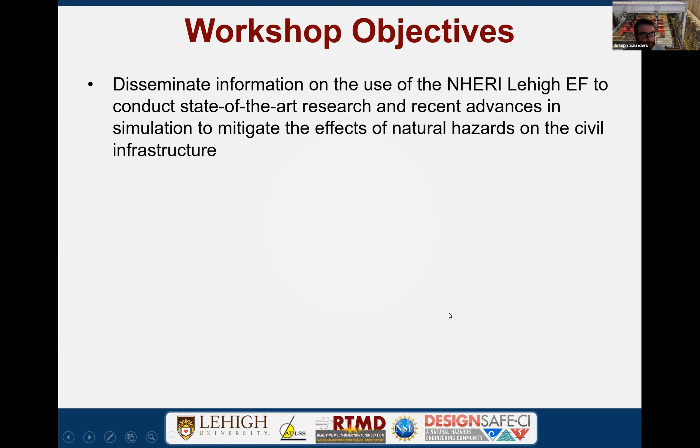Can you go to the next slide please? So our workshop objectives here: our plan is to disseminate information regarding the NHERI Lehigh experimental facility, what we do, the research we do, focused on mitigating the effects of natural hazards on civil infrastructure. We'd like to communicate our capabilities and what we can do.

Also, a focus here is to showcase our expanded capabilities that we've recently partaken in. We've expanded our capabilities at the facility, including the real-time cyber physical structural systems testing facility. It's quite a mouthful, but increasing capability is something we're always looking to do and expand our research capabilities. So we'll go into a little bit about some of the experiments we've done using this new equipment, and showcase and highlight the research we're currently working on in natural hazards mitigation.

And then finally, we'll wrap it up with identifying and showcasing how you can work with us and utilize the experimental facility here.

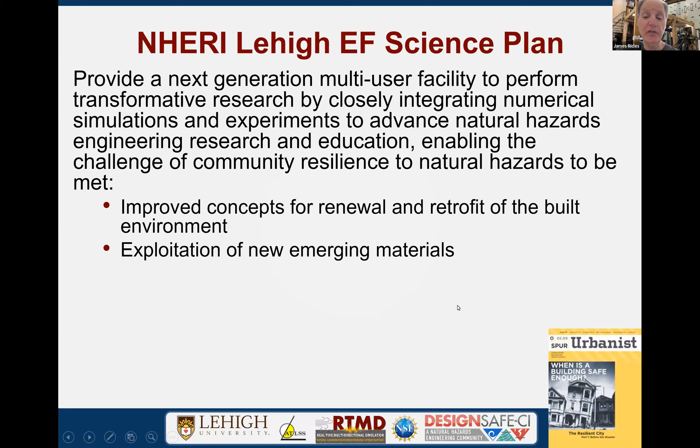To do this, we closely integrate numerical simulations and experiments, and the objective is to advance natural hazards engineering research and education, and to mitigate the effects of these hazards, enabling the challenge of community resilience to be achieved. This is met by improving concepts for renewal and retrofit of the built environment, and exploitation of new emerging materials, some that exist, others under development, and those are the future.

Development of innovative resilient structural concepts, economical design approaches towards natural hazard mitigation, so that innovation and economy is very important, and then development and validation of more accurate physics-based computational simulation models.

In the end, what NSF likes to endorse is that experiments have a purpose, and they're very important. They enable you to acquire data, which we're able to provide the means to do. But in the end, that information needs to evolve to where it eventually reaches practice, usually through computational models that are developed. But in order for them to be accurate and validated, you need the experimental data.

Let me continue with the science plan. One of our focuses, I'll just say one, but we have others, and I don't want to discourage you if you're not into hybrid simulation. Don't worry, I'll entertain you with some other approaches, but we do a lot of multi-directional and large scale real-time hybrid simulations. This essentially combines physical experiments with computer-based simulations to evaluate the performance of large components and systems and their interaction.

If you wish, you could think of hybrid simulation as being cyber-physical simulation. It's basically similar in concept. Our facility provides user-friendly tools that enable researchers such as yourself to readily utilize this advanced testing technology and algorithms to perform complex experiments.

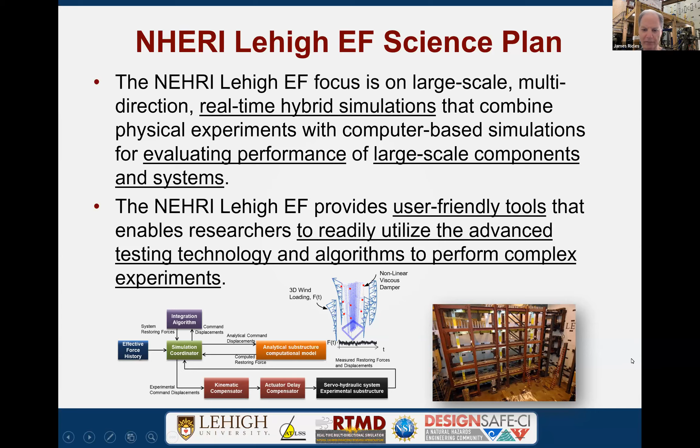Our facility enables researchers to readily perform, I'll give you some examples here, 3D hybrid simulations. RTHS is the abbreviation for real-time hybrid simulations of, again I want to emphasize, complex nonlinear systems. When you get multi-natural hazards, we're thinking about extreme events here, and usually the system may go nonlinear, either geometrically or material-wise.

So that we certainly could account for, and examples could be storm surge, wind, or earthquake. Those are the three that come to mind that NSF has really recently dealt with, particularly the first one with climate change. We use analytical substructures created with robust computational modeling, done this from the ground up, and below is just an example of a tall building at Lehigh that's subjected to multi-hazards here.

We have numerous response modification devices that could be used that are in our lab or that others may bring as researchers, and we can integrate those into the simulation. If there's not enough of these devices that could physically be placed, usually there's a restriction because a tall building may have 100 of these, and of course you may not have 100 on hand, we can numerically model some of those devices and use model updating so you can accurately get an assessment of the overall system and how those devices modify the response, using this model updating in conjunction with the physical model devices.

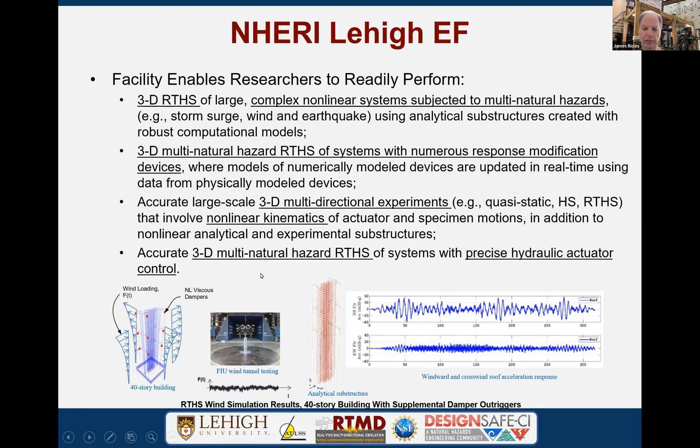What are some of the key questions that could be addressed through the research that you perform on our facility? Just to give you some research ideas. One is to develop and implement into practice new natural hazard mitigation strategies and innovative resilient structural systems. This is a little vague, but it's at the top level of what a proposal may be looking to achieve as an objective.

I think some other things that need to be considered are enhancing our understanding of response to multi-hazards, accounting for soil structure interaction and also fluid structure interaction. You find when you look at soil structure interaction, the whole picture changes. It could be an impediment or it could be an advantage, and it could change the behavior that really needs to be accounted for.

There's a comprehension of the system level effects on the structural and non-structural components through these large simulations. Sometimes the non-structural components are of greater financial and monetary value than the structural components, and the structural system may be condemned simply because the non-structural components don't continue to function. So non-structural is very important as well.

Now, again, I'll just emphasize computational modeling. You can acquire high quality experimental data - we'll talk about some of the instrumentation aspects later - but this will enable you, if you get the right type of data, we always offer some suggestions when asked, on how to develop the improved computational modeling by seeing what data you need to do that. Usually it's force deformation. And the outcome of this is to be able to predict community infrastructure resilience, where these response modification components are integrated to alleviate natural hazard effects.

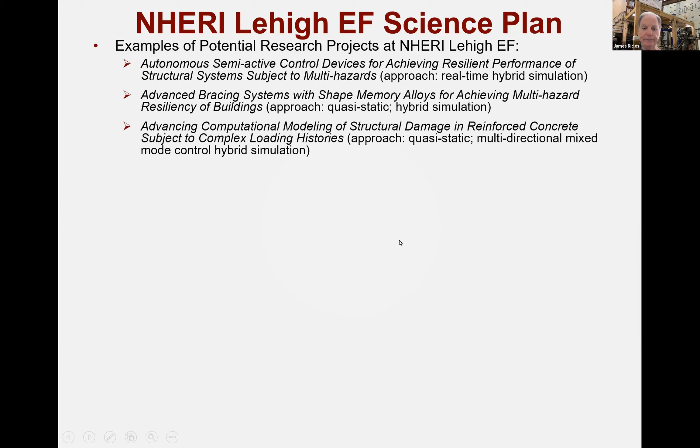On the other hand, you may be wanting to advance computational modeling of reinforced concrete for complex loading histories. There you would perhaps consider some quasi-static characterization tests, as well as multi-directional mixed mode controlled hybrid simulation to get these complex loading histories.

Looking at quantifying multifunctional floor isolation systems through cyber physical testing - this is something that would involve real-time hybrid simulation because of the rate dependency. We have, again, like multi-directional floor isolation systems, non-structural components of systems which minimize the multi-hazard losses. It could be cladding or piping systems, say in buildings as an example. And there we can look at hybrid simulation and real-time hybrid simulation.

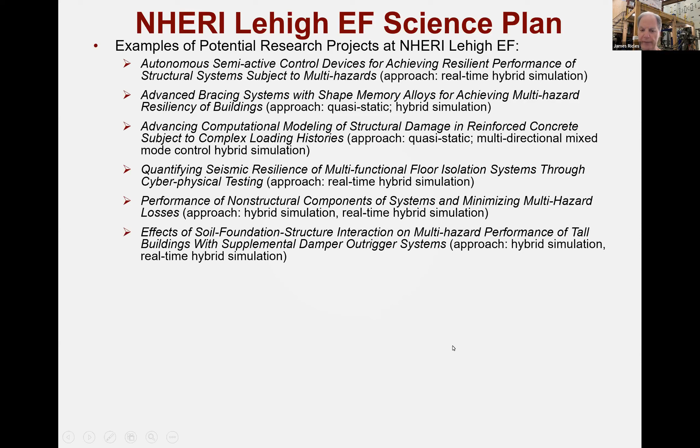Mentioning again soil structure interaction, the effects of that are very important in the interaction that it has on performance, particularly of tall buildings with supplemental damping outrigger systems. These foundations that these systems are tied to could have an influence on the effectiveness of the systems of performance, since these supplemental damping systems are themselves typically rate dependent. You will probably have to consider real-time hybrid simulation, and Liang Cao will show some of the actual examples of some of this later here.

Some of these, of course, will be highway type systems, bridges, and the response to multi-natural hazard. That could be earthquake, tsunami, storm surge. Wind probably is not too much of an issue, although it could be perhaps for taller type systems and cable stay bridges where the cables tend to oscillate and fluctuate from the wind loading due to vortex shedding.

We also have fire that's now also being accepted as a valid research topic by the NSF, and you can consider some performance-based engineering research questions that need to be addressed. There you'd use hybrid simulation for furnace. We'll talk about some of those resources later.

And then looking at response modification devices in buildings, again, considering the soil structure interaction. So it's a little bit redundant compared to what I maybe already mentioned before. And then finally, looking at coastal infrastructure, this has become more on the vision and the target of many entities. In fact, the federal government's been asked to respond to the climate change effects, and that usually is concerned with the coastal infrastructure and the inundation due to storm surge, and of course with earthquakes would be tsunami.

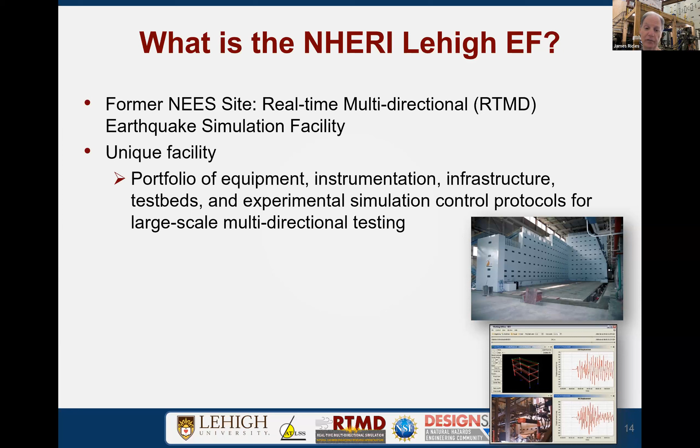But I want to mention very unique in that we have a portfolio of equipment, instrumentation, infrastructure, test beds, simulation, control protocols for large-scale multi-directional testing. And what's not listed there, but may come up later, is also the experience in the staff. You can't operate this without having an experienced staff, both in the laboratory as well as in the strategic planning and operational aspects.

We can host concurrently multiple large-scale experiments. So unlike a shake table facility, I'm not being critical of such a facility, you have one experiment on the table. We can have multi-projects in the lab. You can see a photograph of that on the right there. It was pretty crowded, but we managed to do that and host all those projects concurrently.

Mention the experienced staff, that's very important. And also I mentioned Atlas. The Atlas Center is Advanced Technology Large Structural Systems. It's a former NSF sponsored center, but we've graduated from that, but we continue to operate, and that offers a lot of resources that we can leverage with our NHERI resource. NHERI, if you don't know, it's a Natural Hazards Engineering Research Infrastructure. That's a community of experimental facilities operated by NSF. So our niche is we have an Atlas facility that offers many resources in addition to what we already have under the NHERI. We'll see some examples later.

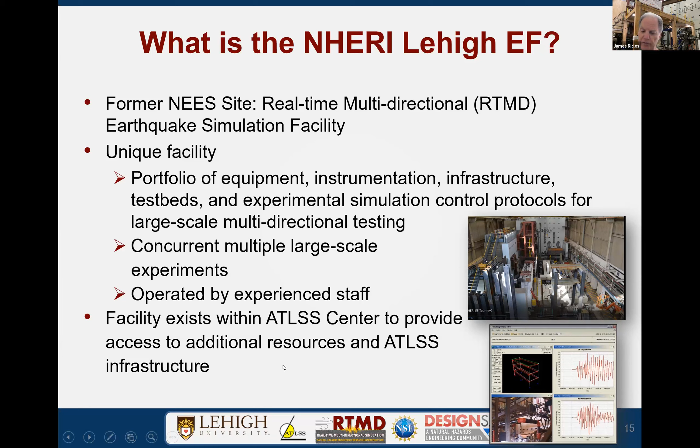So the people are, as I mentioned, very important. We have expertise on a lot of levels. I'm actually a registered professional engineer, so I'm very familiar with practice, particularly in California, where I'm registered. We have a number of other staff as well that are professionally registered. In addition, a lot of us have industrial experience, so we're really in touch with reality. We have expertise in structural engineering, earthquake engineering, geotechnical engineering, aeroelasticity, wind engineering, hydrodynamics and fluid structure interaction, probabilistic-based modeling, structural monitoring and damage assessment, and also coastal structures and inundation from storm surge and tsunami.

We'll be adding a new faculty member to our group there. It would be Claudia Reich, who's currently a postdoc at Oregon State University. Her expertise is in coastal structures, inundation from storm surge and fluid structure interaction. And we're pioneers in real-time hybrid simulation.

We didn't invent the topic, but we've tried to advance it. I'll give a lot of credit to Steve Mahin, and also our colleagues in Japan who originally developed that. Steve Mahin advanced it, and then Professor Nakashima did some of the first real-time hybrid simulation. We built upon their developments and advanced the technique to where we use it on a regular basis.

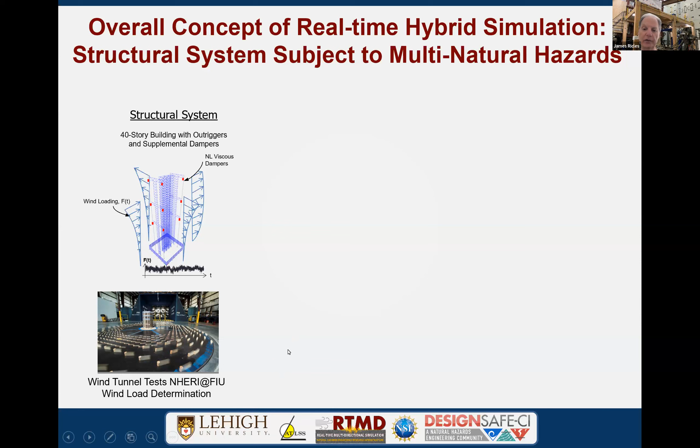For this initial description, we're going to consider wind loads to be predefined, but they don't have to be. As you'll see later, we can actually do fluid-structure interaction where the wind is defined as the position of the structure evolves. In any event, if we want to look at the performance of the system, particularly these dampers - and you may not realize, but nonlinear viscous dampers, there are models that exist, but the models are not necessarily accurate if the properties are changing, which in fact they do more under earthquake than wind.

As a result, we're going to have to put something in the lab that we can't model numerically. So we're going to call that the experimental substructure - in this case, it'll be the dampers. And if we have a good numerical model, what we call the analytical substructure, we'll put that in. So those components we feel relatively comfortable and confident can be modeled accurately.

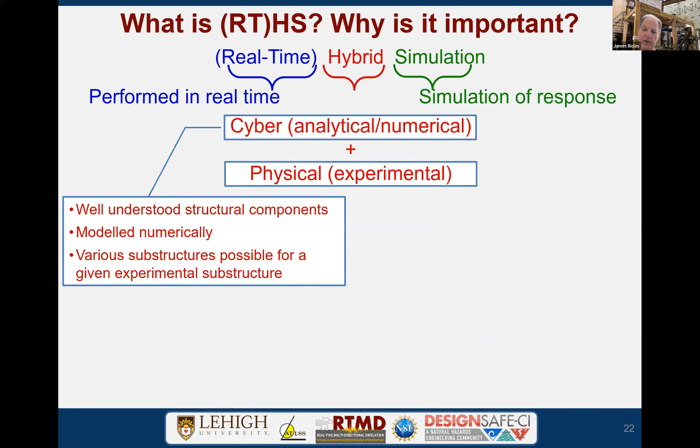So why would we want to do that? Well, it's performed in real time. It's a simulation response, and hybrid is basically the cyber and physical worlds combined. The cyber part is well understood components, modeled numerically, and you could have various numerical or analytical substructures for a given experimental substructure.

The experimental part is not so well understood, so it's something maybe new that you want to incorporate into your research. It's modeled as a result and physically with the appropriate boundary conditions. This is very important—you want to account for the appropriate boundary conditions so you get the proper interaction of the physical experimental substructure with the cyber or analytical substructure.

These are kinematically linked and synchronized in time. You want to really consider full scale or large scale, because size does matter. For example, heat is dissipative—thermal mass is important there in dampers. Unless you do large scale, you're not going to account for that.

Connections are important, especially welded steel, concrete. All that really should be done at large scale. So it's a very cost-effective method for that purpose. It integrates the numerical and physical aspects, so you get the best of both worlds.

It allows you a comprehensive system and component response—what I mean is you can account for the interaction between the two. The other thing not mentioned is you can dictate a realistic level of hazard.

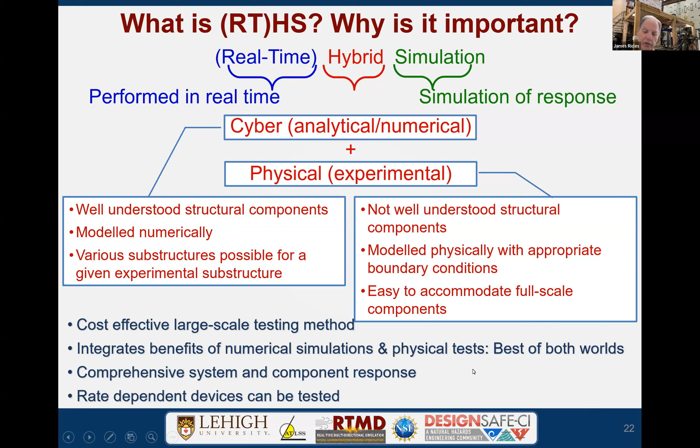For example, in earthquakes, you usually have a hazard level, maybe the MCE, max considered level, or a design level earthquake, or the more frequently occurring earthquake. You can stipulate that, or in windstorms, a mean return interval. You can associate your simulation with that and account for rate dependency.

I can give some idea about some of the different types of capabilities I've mentioned already. Number of times, hybrid simulation real time would be large scale, as shown on the right-hand side of this slide as a photograph—this is an earthquake simulation of buildings with dampers. You can see the multi-universities that participate, including ourselves—Cal State Northridge and Cal State Pomona.

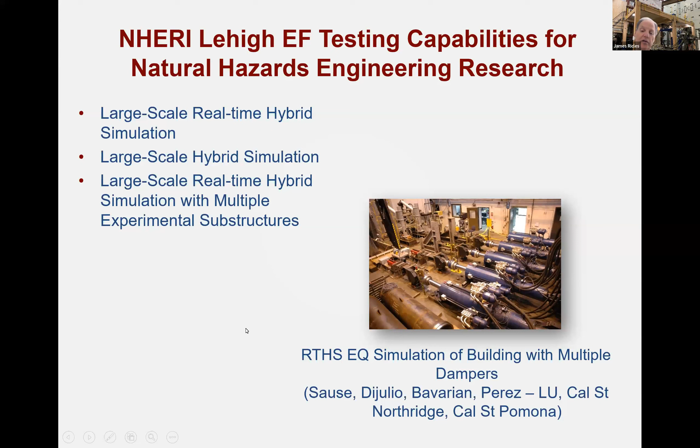We also have large-scale hybrid simulation, which is slowed down. We also have large-scale real-time hybrid simulation, in which we have multiple experimental substructures, shown here again, participating with some of the external universities. Here we have 5 blue-colored actuators—there are actually 5 test beds with different dampers located at different locations in the structure that is numerically defined.

Now, we've also participated geographically distributed—this is just one of several examples. In this particular case, this is a transportation system, a bridge structure in which we participated with University of Illinois and RPI, which modeled the foundation under one of the piers in their centrifuge, and then we modeled another pier physically. There were 2 other piers modeled physically at the University of Illinois. So the superstructure tied all this together.

The bridge deck was modeled at the Advanced Supercomputer Center at University of Illinois. That was a distributed hybrid simulation. This was not done in real time, but we have also done this in real time, which I'll get to in a moment.

I want to allude to this ECI program that NSF has, and you can go on the NSF website to get more information. You can look at transportation systems and consider some of these opportunities. Another opportunity here, this is actually what Dr. Sause did some of his work on, orthotropic bridge decks. We have a lot of experience at the lab with bridges.

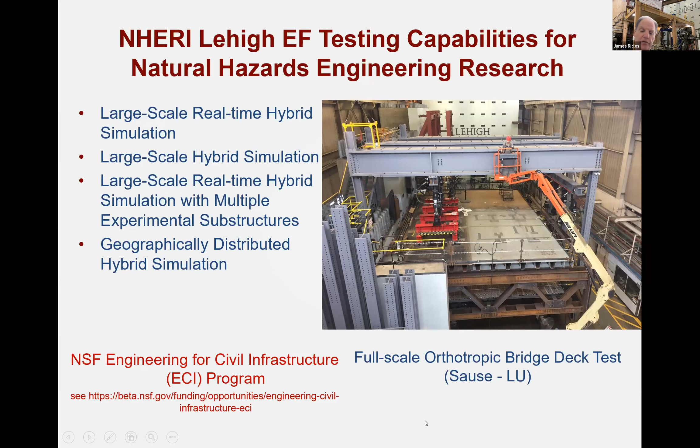Getting back to this distributed geography, it means you have locations at different sites. As you probably sensed, these were different universities. Again, this can be done in real time. Lehigh and UIUC did some work with UConn, in which we did some dampers that were semi-active, actively controlled. One was at Lehigh, the other at UIUC. The coordinator was located at Lehigh, but it was developed by UConn, operating in real time under the auspices of Dr. Kim and Dr. Christenson, Professor Christenson at UConn.

Now, looking at other approaches, you sometimes don't need to do hybrid simulation to do research. You may just need to characterize a device, with predefined displacements or loading. That could be quasi-static or in real time, but it's characterization testing in any event. Here are some examples of an MR damper, semi-active control. Upper left, lower right you don't see it, but that's a temperature-controlled chamber. There's a viscoelastic damper placed in that.

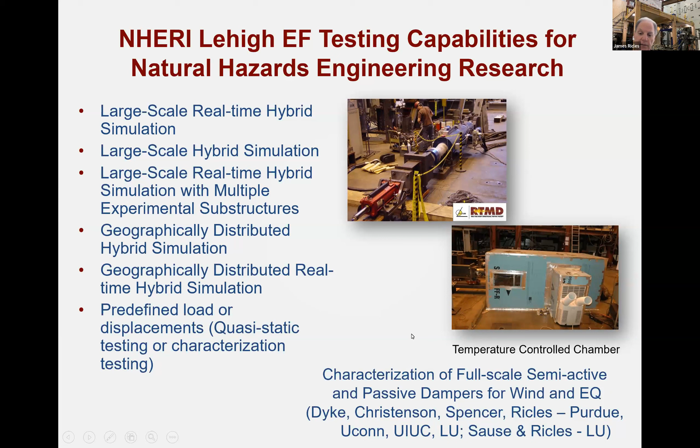I show some other researchers, Professor Christenson and Spencer at Purdue, UConn, and UIUC. Myself, I was involved under a joint collaborative effort involving different projects, and then also another one with Professor Sause, looking at these viscoelastic and viscous damping materials and dampers.

We also have another project in which we're participating with Iowa State and University of South Carolina, involving a rotary friction device. This is a very important semi-active control device because the output has 100 times amplification of the input effort. So you put in a small amount of force in pounds, and you get kips out of this friction device, through this rotary technology. I think Leanne Cao will explain more of that later.

Now, we could also look at characterizing large components, such as this coupled shear wall. This was done under the auspices of Professor Kurama and Professor McGinnis at Notre Dame and UT Tyler. They did some of the work in our lab, and it also involved advanced instrumentation with digital image correlation, which you can sense from the cameras in the mid-ground behind the computer monitors.

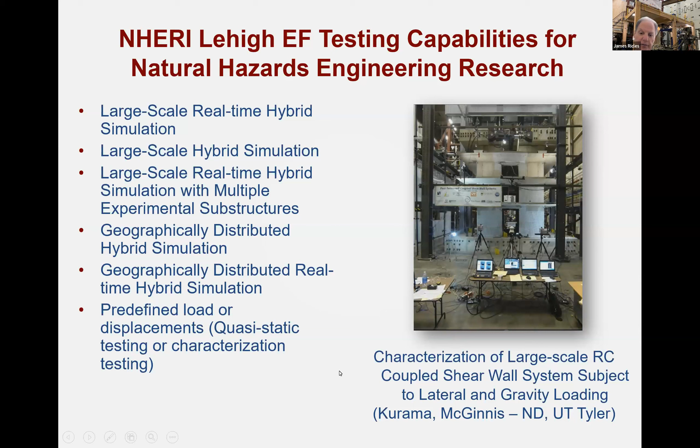We also have a fire chamber, or furnace, in which you can do fire testing. It's now accepted by NSF. This is something in which you can build a furnace around your specimen. This was a composite floor slab subjected to gravity loading, and the furnace was used to heat the slab and look at the restraints through the connections to the columns and the effects on the slab. The steam was coming off the slab from the heat projected underneath it, simulating a compartmental fire beneath the slab, and the data was used to characterize performance. Again, you can look at civil infrastructure from NSF for further information about these opportunities.

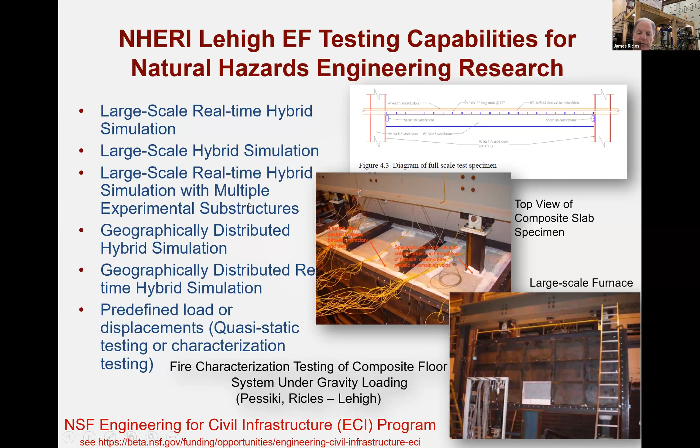Dynamic testing is another aspect here, characterizing the performance of multi-segmental piping systems and structures. These piping systems distribute water, which could be a functional characteristic of the system, but could also be for the fire suppression system. So this is a very important component of a building.

This is a project that Scott Harvey from the University of Oklahoma has been using our shake table for, looking at isolating equipment in mission critical buildings. Here is a shake table that could operate in multi-direction. I think we'll get to some more of the details later.

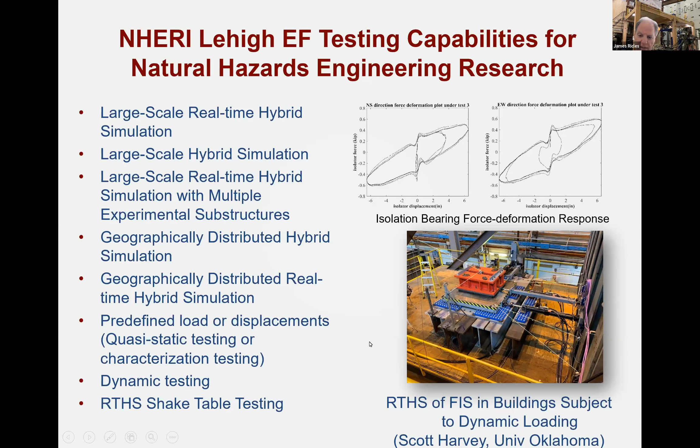We also have tsunami, storm, surge, debris setup that we can do impact tests on.

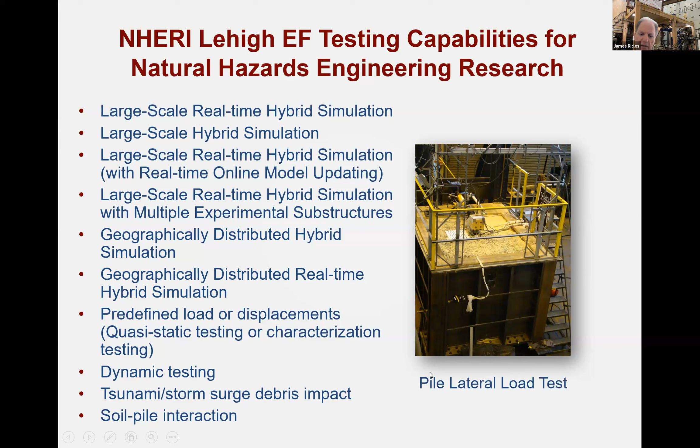I have a number of soil boxes. One of them is the mid-range scale one, in which we can look at soil structure interaction, particularly soil pile interaction. In addition, we've also got a larger soil box and a smaller one, in which we look at offshore wind turbine structures concerned with aeroelastic hydrodynamic loading in conjunction with soil structure interaction effects. I'll get to this a little more later.

Now let's talk about our infrastructure. This you've seen a picture of, this is our lab, I guess the day that it opened. It's never been as empty as it's been since then, which is a good sign. It means we're busy.

See some of the dimensions. You can find more of this information on our website, but we basically have a run here of about 100 feet along the length of the floor. That's a strong floor that also has a strong wall, and the wall steps down from about 50-foot height down to 20 feet over the span, with those little black rectangular shapes being tie down points.

So first, some dimensions: 50 feet in height, over a distance of about 100 feet, and the width is 50 feet as well. We have 5-foot anchor grid points on 5-foot centers, so you can tie down actuators, fixturing, or your specimen.

The strong floor, as I mentioned, the dimensions are actually 40 by 100, again with this grid layout of 5 feet. It has a hydraulic supply system that includes an accumulation system that could provide very high flow to simulate very large demand on components such as earthquake or sustained wind.

We have over 30 hydraulic actuators that the ATLSS facility could leverage with our NHERI equipment. We have digital servo controllers in addition to data acquisition systems, a large array of conventional sensors, and also image correlation systems. And of course, we need something to lift specimens and equipment in place, so we have auxiliary equipment such as a 40 kip crane, and of course forklifts and man lifts, etc.

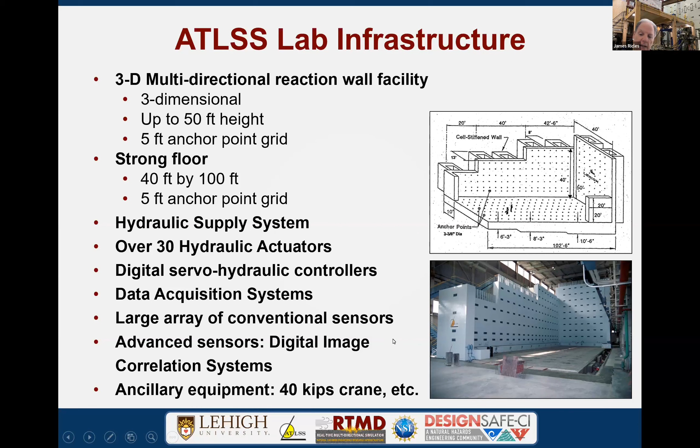Now the hydraulic power, this is provided by NHERI. So that initial ATLSS was the infrastructure we augmented with our hydraulic power and actuators. This allows us, for example, to simulate real-time large earthquake demand in excess of 30 seconds.

This accumulation system that we have provides additional power, hydraulic power, to our pumping system, which has 5 120 GPM pumps. So we can, for instance, get over 4,000 GPM. We've actually tested our 5 dynamic actuators, each of those with 550 GPM servo valves, concurrently.

Some of the details of those actuators, you can see the capacity, in English imperial units. If you want to convert those, I think it's over 2,500 kilonewtons, but roughly 500 kips and about 380 kips are the two actuator sizes. The stroke is plus or minus 20 inches, so about a meter in total stroke. The maximum velocities are 45 inches and 33 inches. If you need to go faster, we can add another servo valve, but this is the standard here.

The valve attached to the actuator is shown on the lower right. The pumping is in the middle of the pump room, and the accumulator is on the right, and the distribution system runs around the lab in the upper left photograph. I mentioned servo valves, we have 10 of these, so we can position them around the actuator as to where the demand needs to be met by the supply of flow.

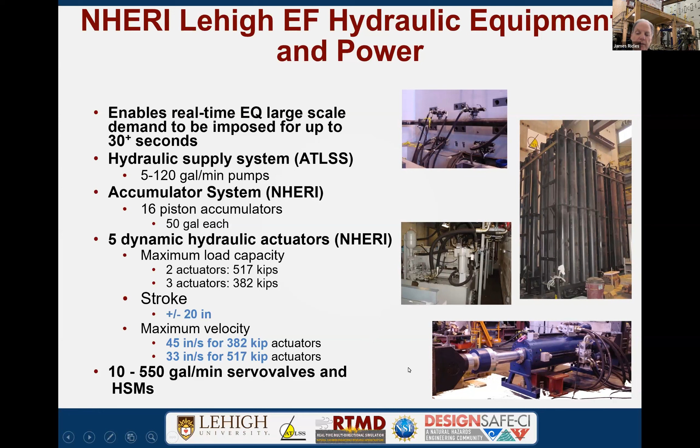All these projects are actually going on concurrently in the lab. Now we have an integrated real-time control system that enables a lot of this, and we configure this to wherever the experiment is set up, so the controller will operate and control the actuators accordingly. The details are shown here, described more in our website as various components, but it allows us to configure a test for the researcher. We can configure these in the mode of the processes I showed for the different forms of testing.

So the servo controllers talk to the simulation coordinator, and it talks to data acquisition, and then also for the cameras, the remote cameras, and the participation are all within this integrated control system, and it interfaces with the servo hydraulic system, which controls the actuators and the feedback for data acquisition.

So we can configure this to run in real time, as I mentioned. But we could also expand the timescale to slow it down for either hybrid, distributed hybrid, or just quasi-static or characterization testing. It does not have to be in real time. It could just be one component, it doesn't have to be a subsystem or a complete structure.

Now, we've also been able to distribute hybrid simulation. We could virtually connect to almost anything. Tommy Marullo's expertise is in the cyber physical, the IT aspects in particular, and we've interfaced with OpenFresco and run OpenSees. We have our own software to do a lot of these things, but if you need, we can use OpenSees, OpenFresco, or any customized software.

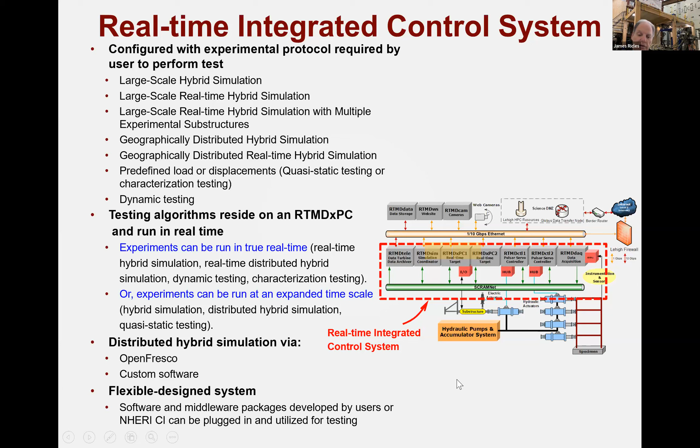We, of course, want to interrogate it, make sure it doesn't cause any ill effects, but we've integrated that with our IT architecture. It's a very flexible design, so we can have software and middleware packages developed by users, or the CI, the NHERI cyber infrastructure component of the NHERI network. These can be plugged in and utilized for testing. Of course, we have to assess that and make sure things are connected properly, but we've managed to do that, and we'll continue to do so with researchers.

Some other resources and combinations: we can prepare specimens, or we can fabricate those on site, or you can have them manufactured, say as a steel component offsite, delivered, and we can then add whatever needs to be completed, or put it in position. Concrete, you've actually poured; in timber, we've actually constructed that as well on site. We have mechanical testing capabilities, very important for material testing.

In an auditorium, we have EOT activities, and provide educational opportunities to the audience there.

So I mentioned our staging. We also have a machine shop. We have various laboratories: intelligent structures, mechanical testing, materials and microscopy, and offices. If you come to visit us, either as a researcher for a planning workshop that you'll see on our webpage, or if you're doing research here, we have offices we could provide to visiting faculty and their students, as well as staff and visiting researchers.

And of course, meeting rooms—I mentioned the auditorium. We also have conference rooms where we hold webcasts and Zooms, and just regular meetings. We have the ability to store things, and it's a secure environment. The facility is locked up at night. We have security come through, and we've got webcams. Not that we spy on people, but it's a secure environment.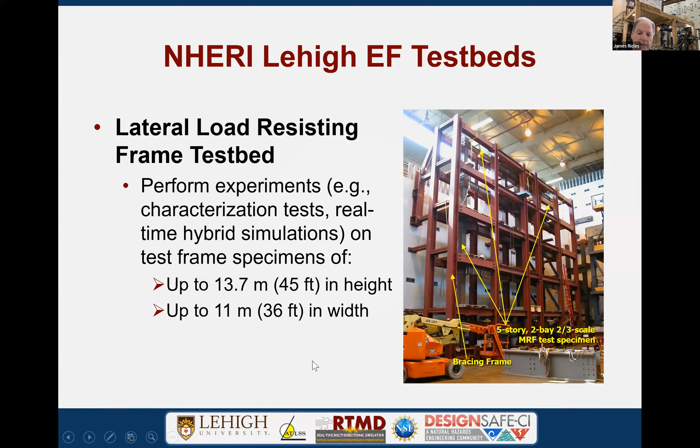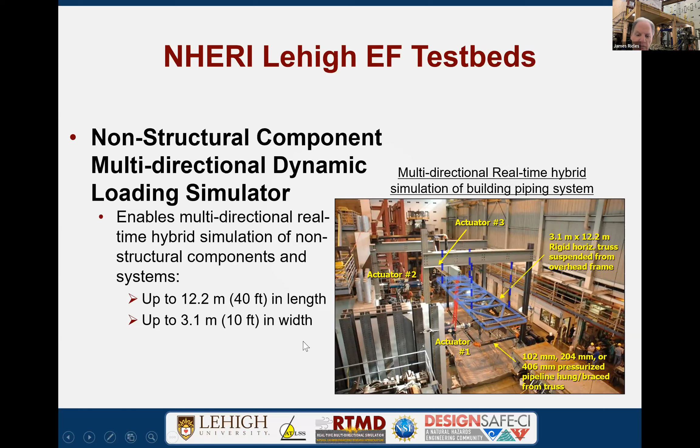We have the non-structural component simulator, where we can test non-structural components. Here we have a suspended truss system that serves as the ceiling from which we suspended a piping system and subjected it to multi-directional motions. Leanne Cal may talk about this, but this was pressurized piping subjected to multi-directional earthquake motions.

The Cyber Physical Structural Systems Laboratory, CPSSL, provides a couple of different resources. One is a real-time test bed. You see some examples here on the right, including friction rotary damper characterization test results achieved in that facility. It's about 4,000 square feet.

It's been created for a couple of reasons. One is to enhance the research, but also the ECO - education, community outreach, and researcher training - to enhance the experience in cyber physical systems. Some of you may have no clue, others may be quite versed, and we can help and provide information for people of various backgrounds. The goal is to broaden the user base of our facility.

One way to do this is to offer small scale, lower cost experimental test beds, and create more hands-on opportunities for cyber physical testing, to give you ideas how to use our facility to meet your research needs. It's very efficient for performing capacity building pilot studies - for instance, fluid structure interaction, soil structure interaction, developing many new capabilities. Researchers have also used them for pilot tests looking to write proposals based on the data they achieve.

These are some of the actuators we have here - various models that may not mean much to you, but I'll list the capabilities below. We also have electric actuators for semi-actively controlling some of these devices. Most importantly, we have an independent integrated control and acquisition system identical to what I briefly described - same software, same hardware, a separate system, but we could link the two together if you wish.

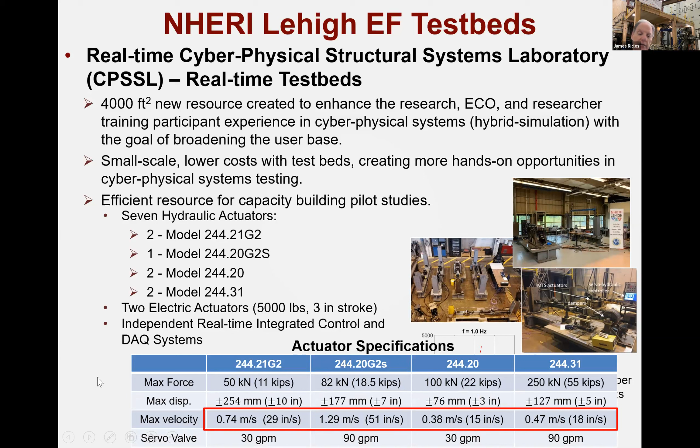Anything we develop in the main lab is transferable and vice versa to the cyber physical lab. These are some of the actuator capacities - they can go pretty fast, up to 51 inches a second. We've got some other slower actuators, but they're relatively fast, ranging in capacity from 55 down to 11. If you need larger capacity, we go to larger actuators, but these allow you to do smaller but realistic tests for your research or pilot studies.

We also have the multi-directional shake table, created for the same purpose as Dory described. Very efficient, as I mentioned. This just shows some of the vision here.

This is looking at floor isolation system, FIS - not fluid structure interaction - of a test bed where we have a shake table with equipment used in mission critical facilities. Mission critical means that if the equipment were to go down, your traffic ticket sitting with the FBI might be gone so you don't have to pay it, or your financial data or medical data on the computers may be lost, which is not what you want.

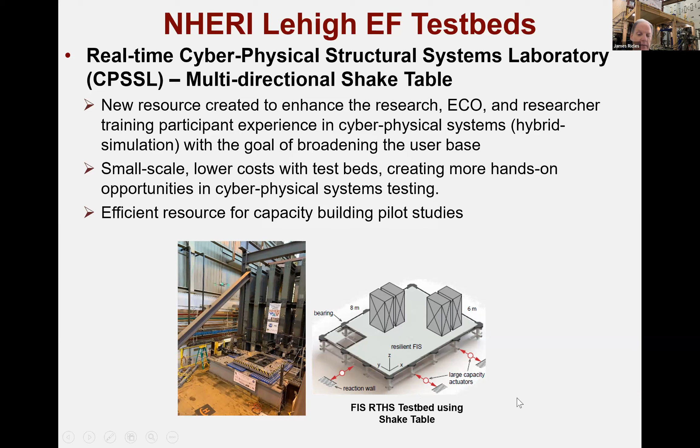So that equipment needs to be preserved, whatever natural hazard event is imposed on it, particularly maybe an earthquake or a severe windstorm. We've been using it for that application. The specs are noted here.

They're also on our website, but we have digital control that goes up to maybe faster. Tommy could answer the question later, but I think it's even 4096, or 2048. We certainly can use 1024.

It's got a payload of 13 kips at 1G. The plan size is 6x6, with plus or minus 7 inch motion in one direction, 10 inch the other, only because of the actuator currently attached to it. But they can go up to 51 inches a second and 29 inches a second in those two directions, the X and Y horizontal directions.

The tie down points, I think, Leanne, are at 6 inches - you can correct me if I'm wrong there. There are a lot of tie down points, and it can be used for hybrid simulation in real time, or just quasi-static testing. We can configure it to use as just a load transfer mechanism, or if you want, conventional shake table mode. So it's very versatile.

We're actually adding a third component, which is a vertical direction here, but that's still in the works. Right now we have translation, and also rotation.

You say, well, that's weird - why have rotation? Well, think of this: if you're looking at a non-structural component, maybe a structural component sitting in a building or a bridge, I guarantee that structure on that floor or that bridge has translation plus torsion, because nothing is ever completely concentric. So if this were on a building floor at some location, you're going to have that torsion, and that torsion will add accelerations to the components.

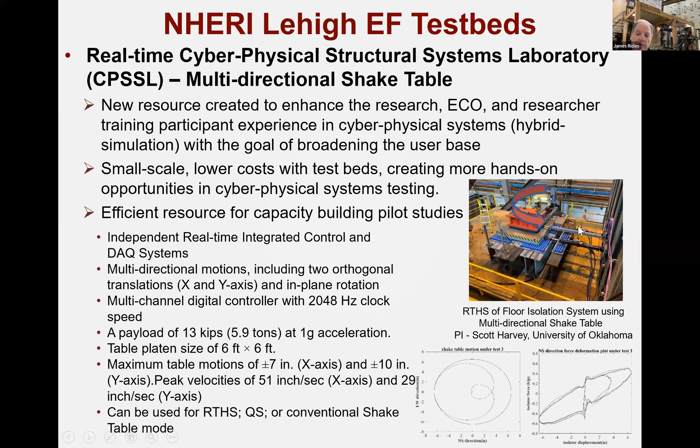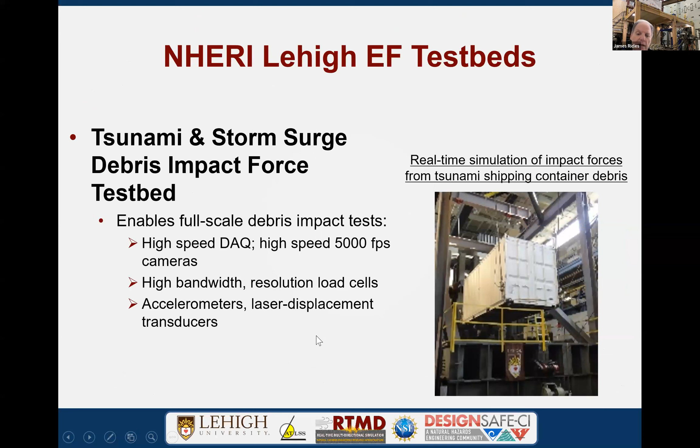Tsunami debris we already talked about. It's got high-speed camera acquisition systems, high resolution load cells with high bandwidth accelerometers, and laser displacement transducers.

We do soil boxes - there are two different sizes. These are flexible designs that could be rearranged, stacking them to be a little bit taller, but they're 6 by 6 by 6 foot and a 6 by 6 by 3 foot. 3 foot is the height there, so we'll be up to 9 feet tall.

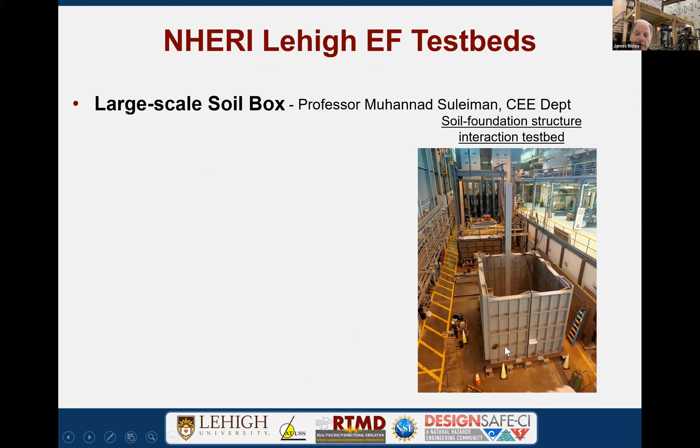And this is being used also for offshore wind turbine testing. We're looking at soil structure interaction with both floating and fixed monopile type systems, in which we have components in the soil box for either characterization testing of that or as a hybrid simulation.

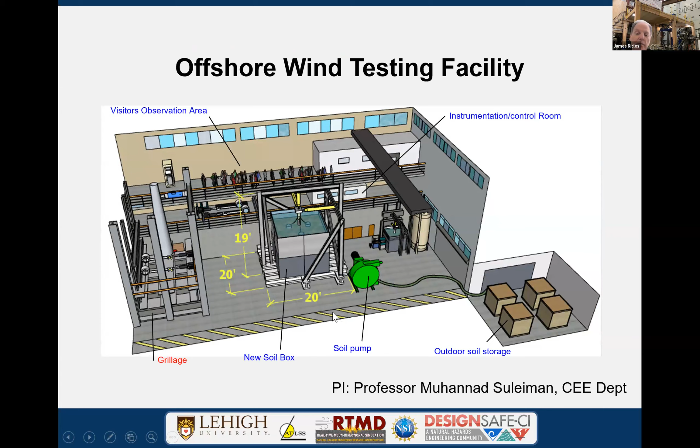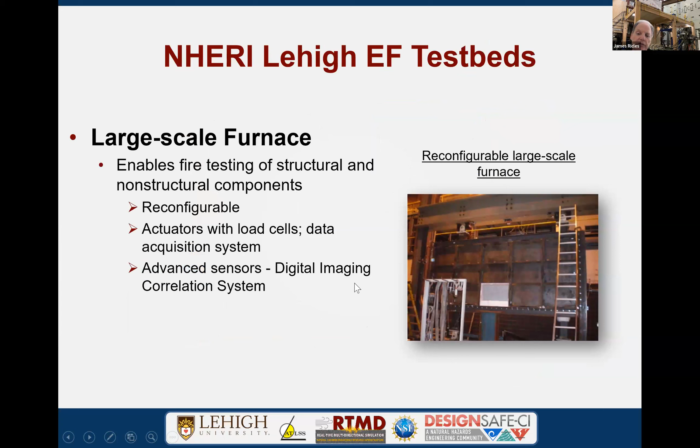We have that furnace I mentioned, which includes digital image correlation under heat - we have a special system for that. We have a number of these digital image correlation systems; in fact, I think we now have 5. The systems are reconfigurable, as I mentioned.

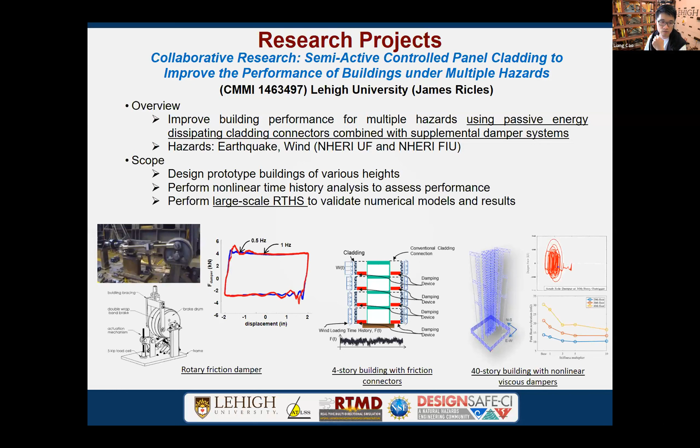Our scope is to develop prototype buildings with various heights and perform nonlinear time histories to assess the performance, and then also perform large-scale real-time hybrid simulation to validate the model and results.

So here we developed a prototype building. This is a 40-story building, as Dr. Ricles mentioned before. It was designed by SGH, and it has BRB frames in the middle, with 2 outrigger frames in the east and west directions.

The target is to run hybrid simulations, installing different types of supplemental damping systems to address multi-hazards. Because of this specific configuration, we installed 12 nonlinear viscous dampers on the outrigger columns in the east-west directions, and we also utilized 1 existing physical damper in our lab as an experimental substructure, assumed to be located on the 40th floor, the top floor.

For the rest of the 11 dampers, we modeled them numerically using nonlinear explicit Maxwell elements, and we used real-time online model updating, where we get input from our physical damper to update the dynamic properties of these numerical dampers. So the analytical substructure has nearly 7,902 degrees of freedom and nearly 3,000 elements.

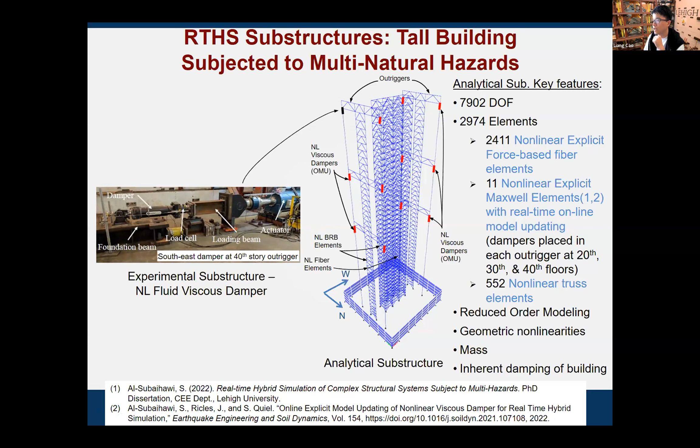This just means we have to do the real-time hybrid simulation, because any slower hybrid simulations won't be able to capture the actual damping force and the dynamics.

This is the 3D real-time hybrid simulation video showing this building equipped with nonlinear viscous dampers subject to a ground motion MCE level earthquake. You can see the right graph plotting the north-south and east-west displacement, and also the ground accelerations. The top one shows the roof displacement in top view.

The next two graphs are the first story BRB frames in both north-south and east-west directions. You can see during the earthquake, the building develops a high mode, and all BRB frames had nonlinear behaviors, indicating the BRB frames start to yield.

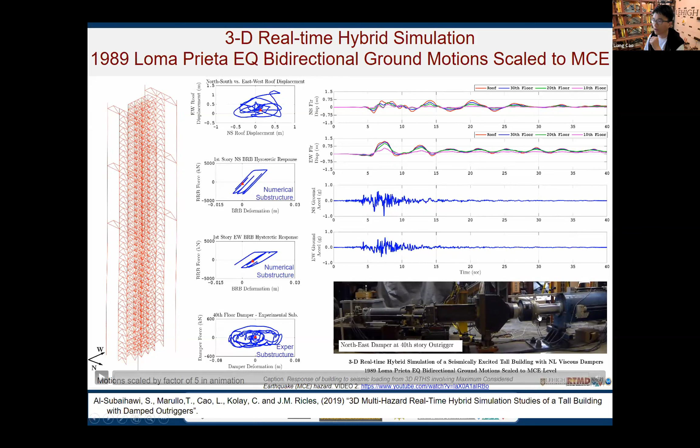The bottom one is actually the damper hysteresis, captured from the experimental substructure, showing on the right the damper force and displacements. You can see this nonlinear behavior indicates the energy dissipation by these dampers.

We also studied damper and steel building performance under wind load. First, we developed aerodynamic building models at 1/150th scale, and installed them at NHERI FIU facilities to obtain the wind pressure time histories distributed on the buildings.

Second, because we only have outrigger columns on the east and west side, that's where we installed this viscous damper, affecting east-west direction vibrations. But on north-south, we tried installing tuned mass friction dampers on the roof to reduce accelerations under wind load, utilizing a new type of symmetric dampers we call banded rotary friction dampers, which serve as another experimental substructure for these hybrid simulation studies in the other direction.

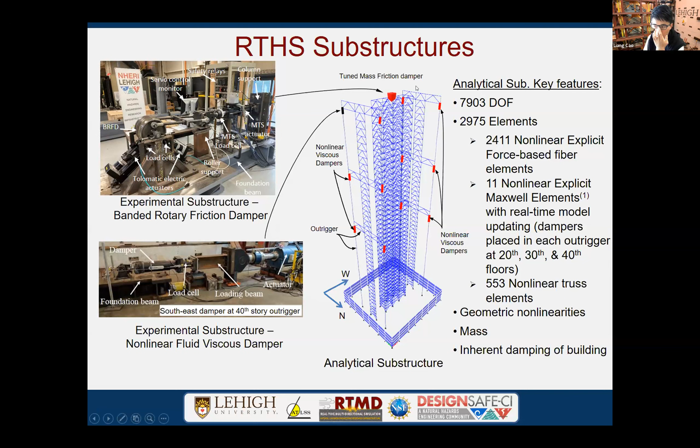Here is the video we conducted under wind loads. The wind load test contains about 6 minutes, so we sped up this video, but we did conduct it in real time.

You can see the wind is actually blowing at 45 degrees. If you look at the top roof displacement, there's vortex shedding happening there. This indicates the importance of running tests in multiple directions, because if you only do 2D tests, you're not able to capture this vortex shedding.

Under the wind load, all the BRB frames behave linearly, but we still model them using nonlinear elements. The bottom two graphs show the friction damper hysteresis on top and the viscous damper on the bottom. You can see the friction and viscous dampers have totally different nonlinear dynamic behaviors, which is hard to model numerically. This highlights the benefits of running real-time hybrid simulations - we just don't have to model this.

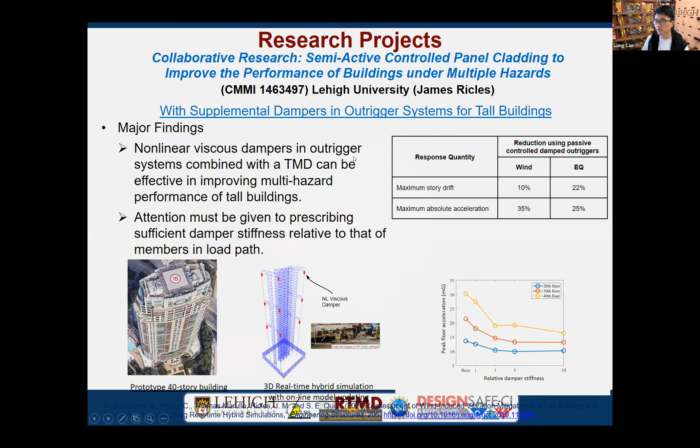So here's the quick result. The major finding is that a nonlinear viscous damper in an outrigger system combined with a TMD can be effective in improving multi-hazard performance of tall buildings. It can significantly reduce the wind and earthquake maximum acceleration by around 30%, and attention must be given to prescribing sufficient damper stiffness relative to that of members in the load path.

After that, we noted that under wind load we were only utilizing aerodynamic models. So next, this project is a collaboration between Lehigh and FIU facilities. Here we try to develop a new 3D real-time aeroelastic hybrid simulation technology to understand the effect of wind-structure interactions. Instead of building aerodynamic models, we built new aeroelastic models at the FIU facilities.

The entire building is controlled by two electric actuators with a base turning rotational center at the base. The simulation coordinator gives a command displacement to the aeroelastic substructure, where those two electric actuators make sure the building can move as needed.

We're also utilizing a new small type of damper, adding another experimental substructure. This means we're not only able to do real-time aeroelastic hybrid simulations, we can also add physical dampers to retrofit buildings for natural hazard mitigation purposes.

This has 2 major improvements with what we did. Also, comparing with conventional aeroelastic models, all these structural properties are built into the analytical substructures, modeled in the computers. So we don't have to model any mass or stiffness in the aeroelastic model, where we can put all the pressure taps around the buildings to measure the real-time pressure distributions on the buildings. Here's the video of these tests.

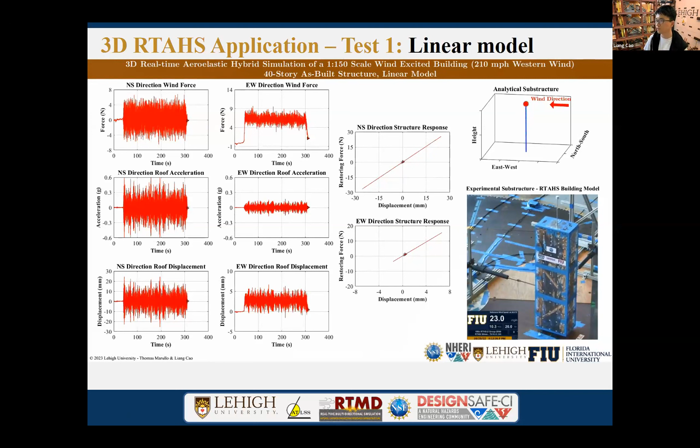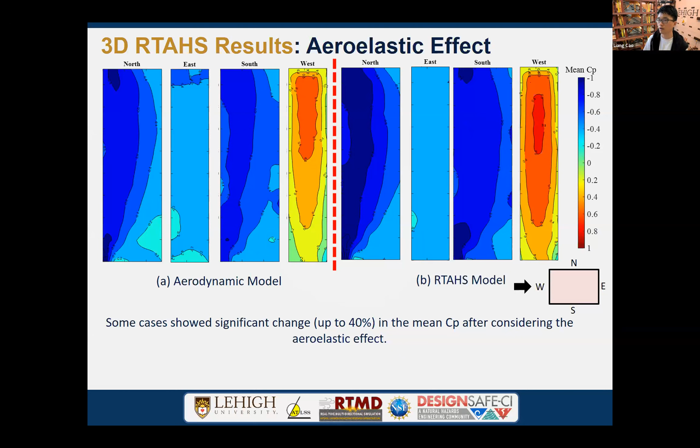Here are the major findings comparing with the aerodynamic models. We found some cases showed a significant change in the mean CP values after considering the aeroelastic effect. For example, on the windward side, when we look at the wind pressure distributions, we found up to a 40% change, which you can see from the contour plot. This can significantly change the wind design in current design codes, because all these parameters basically come from aerodynamic models. But when you consider the aeroelastic effect, there's definitely a big change in the wind design.

Next, we're going to talk about adding soil-structure-foundation systems, where we added soil structure interactions to these 40-story buildings. Instead of using models with 1,000 degrees of freedom, we're actually using a neural network to represent the foundation systems. We did studies on both earthquake and wind loading. So for this benefit, we use a neural network-based method trained using machine learning to study the soil structure interaction effect. In this case, we only did 2D models.

Comparing with 2D OpenSees models, which use 1,000 degrees of freedom to represent the soil, you can see that when we add a neural network model, we only use a four-layer neural network with 8 inputs and 8 outputs, which significantly reduces the degrees of freedom needed, so we can perform real-time hybrid simulations.

We also did a study to first compare the neural network model with the OpenSees model. You can see on the right, the time histories: our trained neural network model matches very well with the OpenSees model. This means the neural network model can effectively represent the soil structure interactions.

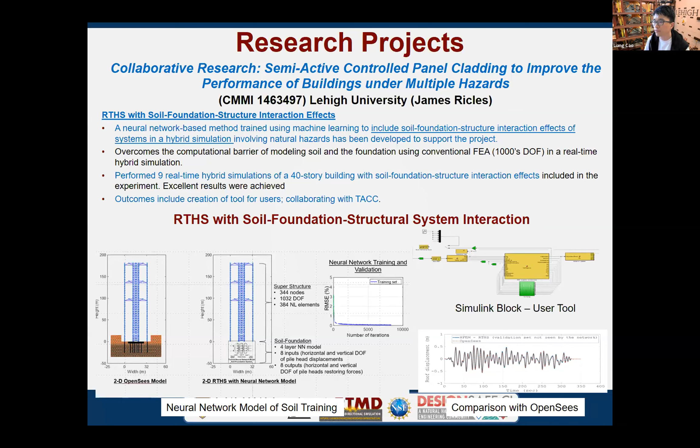The next project is from external researchers, Scott Harvey's group at the University of Oklahoma. They try to investigate the multidirectional nonlinear dynamics of floor isolator systems. The picture on the right shows the floor isolator system, with 4 rolling pendulums. These systems are designed to protect non-structural components, and their purpose is to utilize our facilities to investigate the performance of this isolator system and evaluate design methodologies for these rolling pendulum bearing systems.

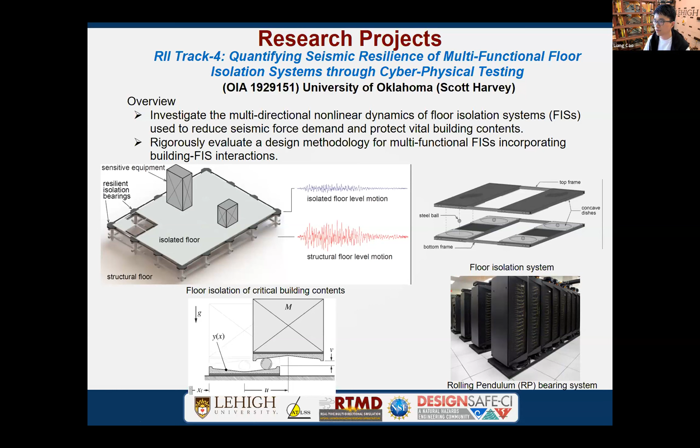Here, we perform a large-scale characterization test first to experimentally validate the physics-based mathematical models. We also perform large-scale real-time hybrid simulation to quantify the performance of these isolators. We put the floor isolators on our shake tables, and also added 2 red beams to mimic the non-structural component weight. We also installed 3 restrainers because in this case we're doing things upside down - normally we let the top carriage not move but move on the bottom. We also use 3 load cells to measure the damper force from the isolators.

And because of this damper, this shake table is able to provide multi-directional movement, including rotational. It's ideal, fitting the needs for this floor isolator system.

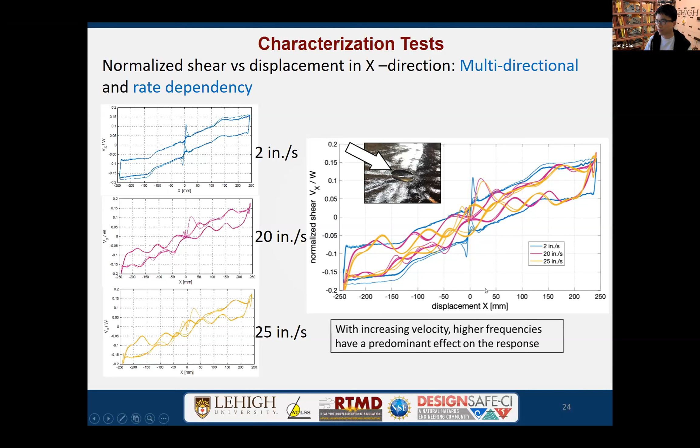So first, here's some characterization test results. We did multi-directional characterization tests, and here we're only showing one directional normalized shear and displacement. You can see under different frequencies, there's a total difference in dynamic behaviors. It indicates the need to do the real-time hybrid simulation because of the rate dependencies.

So here's the hybrid simulation scheme. We select the structures of interest and also the non-structural components, such as several cabinets on top of the isolator systems. We numerically model the structures in the analytical substructures. We also have 3D cabinet models, numerical models, where because this model is not connected with structures, the behaviors are embedded in the structures. And the physical experimental substructures will be the floor isolator systems.

So once the simulation coordinator receives earthquake ground motion input, it generates analytical commands to the analytical substructures, and experimental commands to both the physical isolators and the 3D cabinet models. And then we receive the restoring force from both, and calculate the real-time hybrid structure response.

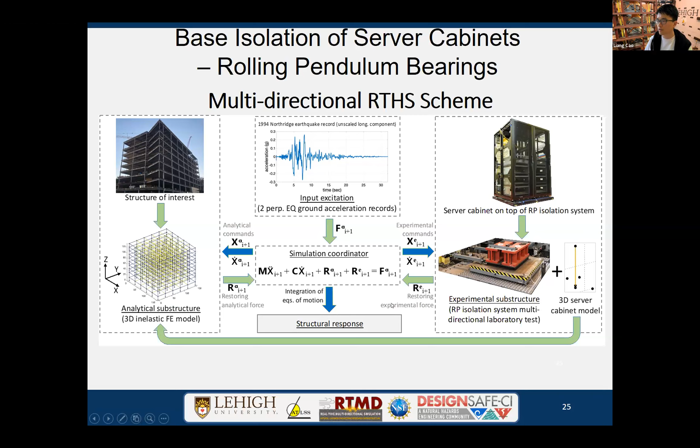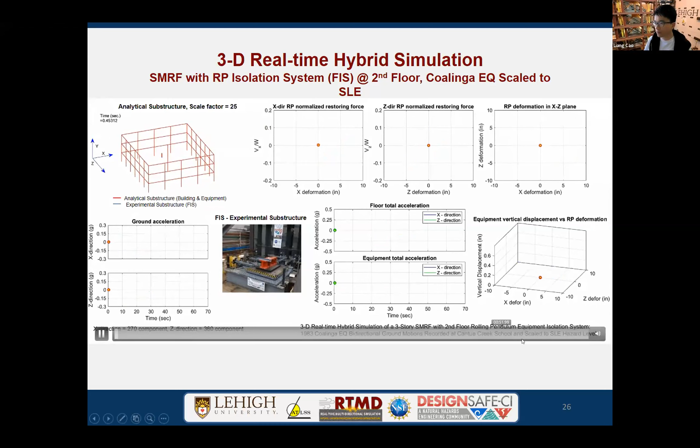So here's the major results. By installing the floor isolators, we are able to achieve almost 81% reduction in one direction and nearly 70% in the other direction. It's showing the effectiveness of these floor isolators.

So the last project is from Southern Methodist University. They developed a new type of pressurized sand dampers, a new type of passive damper. Their purpose is to characterize dynamic behaviors under different temperatures and perform hybrid simulations to study the natural hazard mitigation performance.

So to do the various temperature tests, we first developed a mock-up system, and we utilize wire-type heaters wrapped around the cylinders, and thermocouple controllers to control the temperatures. You can see the target temperatures, and we have different thermocouples measured at different locations to study this. Once we reach the temperatures, we conduct a dynamic characterization test.

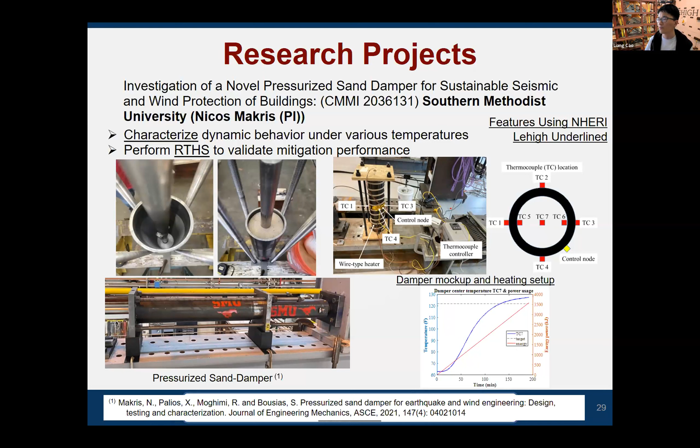So ideally for the dampers, the damper force comes from the friction between the piston rod and the sand. We also give pre-compression to generate pressure on the sand. So once the piston rod is moving, because of the pressurized sand, the damper force can be significantly enhanced, increasing the energy dissipation.

So first, we install the dampers in our facility, the test bed, to do this dynamic characterization test. Next, we also studied these dampers using real-time hybrid simulations, where we study single-story CLT structures. We install two dampers on the CLT rocking wall systems, and we assume this.

So for this hybrid simulation, the two physical dampers are installed in our lab, and we assume these two dampers are located on the side of the CLT rocking walls. To capture the self-centering capability, we have post-tensioning in the middle of the CLT wall, which Alia is going to present later, talking about this CLT wall system.

So all these analytical substructures will be the CLT rocking walls, and we're using different types of gap elements to mimic the rocking of these structures.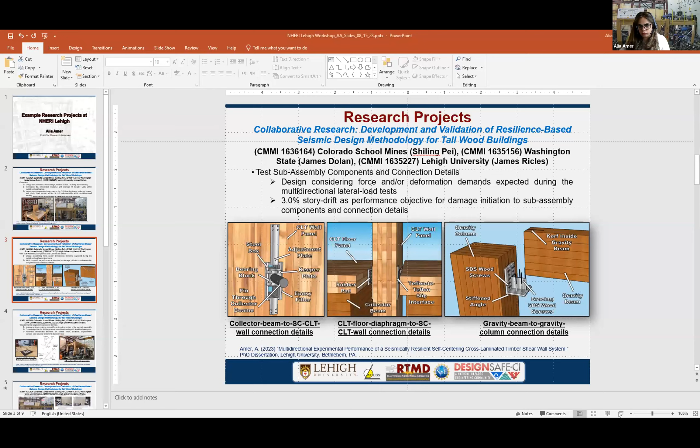Is it on presentation mode? Is everything okay? Can you see it?

Yep, looks great. Okay, so I'm going to present the projects that I'm actively involved with. The first one is a collaborative project with the Colorado School of Mines and Washington State University. I'll mainly present the work done at Lehigh.

The overall objective of the project is to investigate the seismic resilience of tall wood buildings. We have here the test sub-assembly, which still exists at our facility and can be used as a test bed for collaborations with researchers. It's part of a prototype wood building that consists of a rocking CLT wall, a floor diaphragm, collector beams that collect the lateral forces from the floor diaphragm to the wall, and a gravity load system.

This gives us a better understanding of the structural components' behavior under multi-directional loading, so we can impose in-plane and out-of-plane loading on this test sub-assembly, and also achieve a more realistic performance of the building where all the structural components interact together under multi-directional lateral loading.

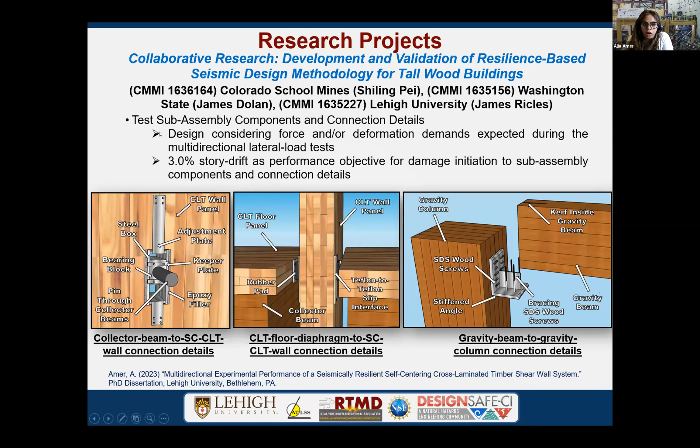The complexity of this project was mainly that we wanted to control a large-scale sub-assembly that also has a flexible diaphragm. We wanted to impose in-plane and out-of-plane displacement on the sub-assembly, but at the same time the floor diaphragm is subjected to vertical motion or drop because of the gravity column rotation. So we established a 3D kinematic relationship between a control node on the sub-assembly and the actuators.

We had a specific layout for sensors to give us feedback in 3D, and also a kinematic relationship with the actuator command displacement in order to control the sub-assembly.

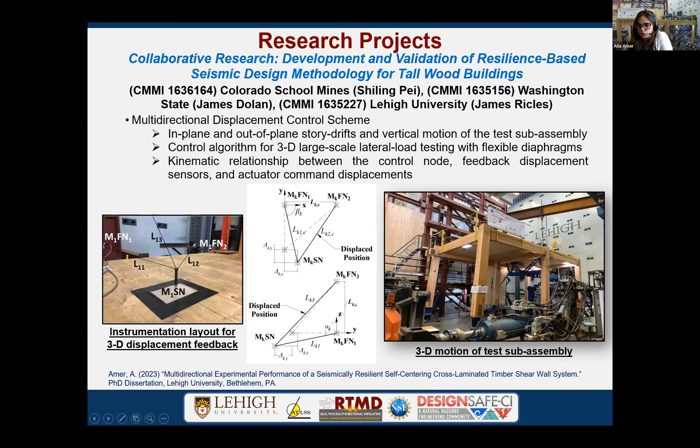You can see here a video of one of the lateral tests we performed under multi-directional loading up to 4%. The red line is the target floor diaphragm story drift, and you can see how accurately we can control the sub-assembly and all the 3D kinematics.

The other project I'm currently involved in is a collaboration with Howard University. The main objective is that we wanted to use vision-based sensors, or video cameras, as our main displacement feedback, instead of conventional displacement sensors like LVDTs and linear potentiometers.

This lets us overcome all the limitations from conventional sensors, like the extensive time and effort in calibration, mounting, and wiring, due to the discrete points needed to measure or track displacement. On the other hand, the computer vision-based tracking method lets us track single-point, multi-point, or full-field displacement in the same frame.

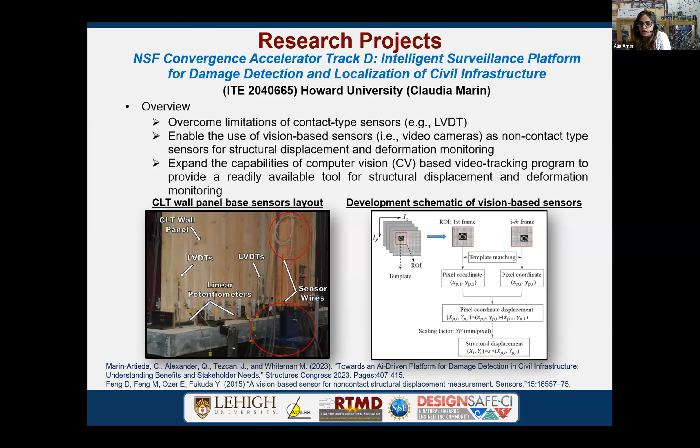We are expanding right now a video tracking program where we are applying this method on current projects in the NHERI Lehigh experimental facility.

For example, this is one of the projects where we were tracking the tip deflection of a cantilever plate, and we are comparing the feedback from different camera lens types and resolutions with the feedback from an LVDT. You can see how accurately we can track it.

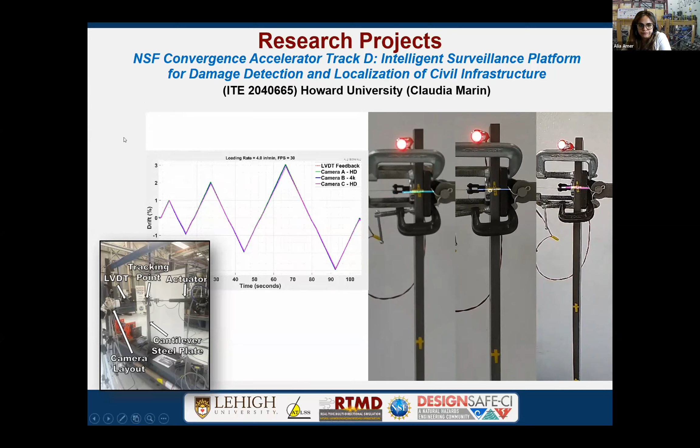And Dr. Ricles will now summarize the resources and capabilities of our facility.

Yeah, thank you, Alia. I'm going to go ahead and share, take the screen here, and what I want to do is just summarize, and then Dr. Saunders is going to describe to you how you can go about taking advantage of what I'll emphasize here.

So in summary, in terms of the resources and capabilities, I'm going to emphasize something here about size. Size matters. And the multi-directional loading effects do matter. This is very important in terms of when you write a proposal and do your research, you want to be competitive. There are a lot of research questions that relate to this.

So you need to consider these aspects when you write your proposals.

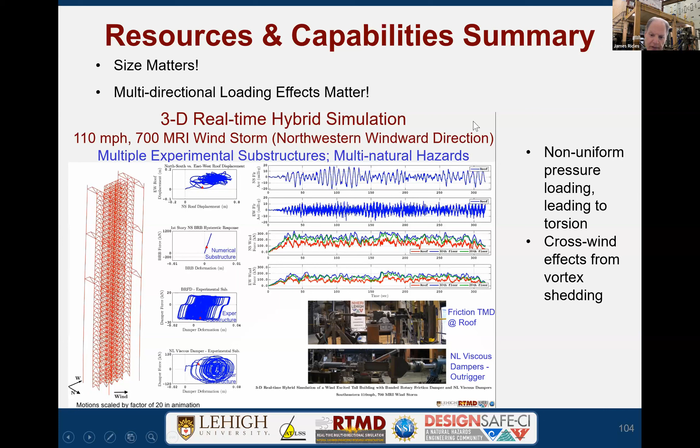Just to give you some examples, Liang had talked about the wind loading on this structure. The wind was blowing in the northwest direction, and there's differential pressure that acts non-uniform around the circumference, in addition to vortex shedding. So there's a crosswind effect in addition to this non-uniform pressure, which creates translation as well as torsion, and some higher frequencies result from that. This is going to change the response if you only assumed planar type motion and didn't consider the 3D effects. This was illustrated quite graphically by Liang here.

I think the other thing is you saw this video and it was played back pretty fast. That test, I guess, took a few hours, but Alia played it back pretty fast. But yeah, I was limited with time. Yeah, no, that's okay, I think it's very effective.

But what I wanted to point out is in the upper right-hand side, you see these panels at the base of the wall, and there's actually damage that develops. As has been stated already, the purpose of this work was to look at the damage that is accrued. What we found, and this was something that Dr. Sause, who is a collaborator on this, suggested we consider the fragility. Under multi-directional loading, when we generate these fragility curves, we found the probability of exceeding damage limit states increases by maybe even more than a factor of 2 compared to unidirectional loading. That means everything that's been assumed based on unidirectional loading is not necessarily conservative, because under true earthquake loading, a building is subjected to bidirectional effects. So you likely get more damage than you accounted for if you ignore the multi-directional effect.

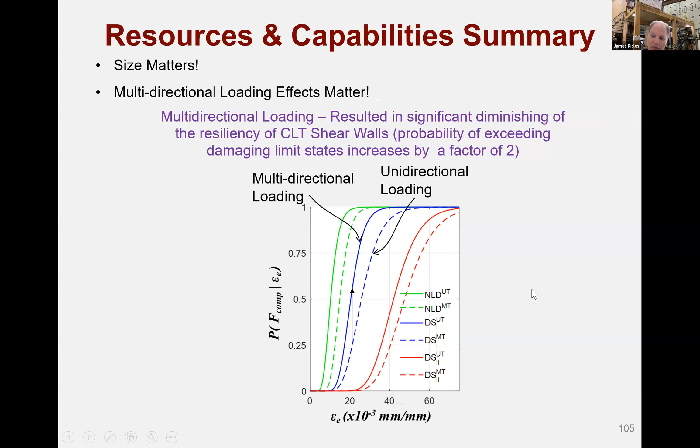So these are just two examples, but you could probably envision more. What I want to note here is that as a facility we have some unique capabilities that you may not have in your lab, but we're open access. We can accommodate you to do this type of work where you need to consider multi-directional effects. We have the experience, the resources, and the equipment to do this, and we could generate cutting-edge research results that produce very important data. I just want you to keep that in mind.

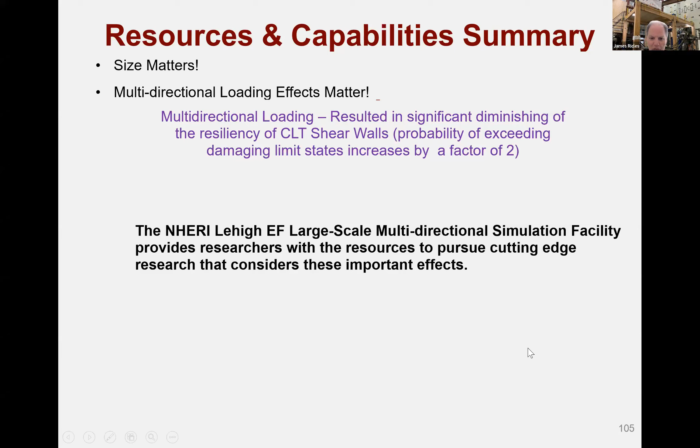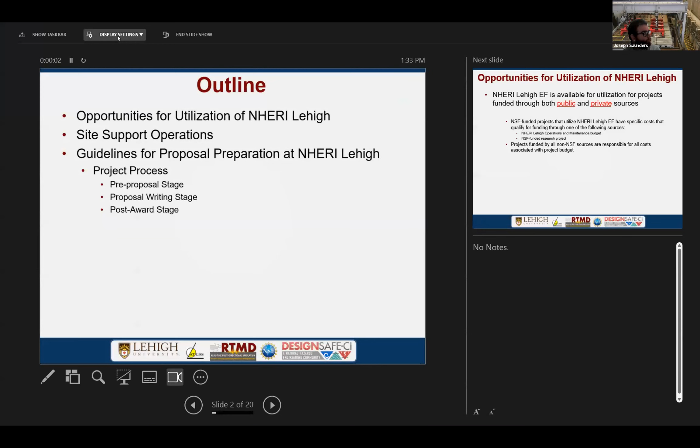Give me one second. Is that okay? Yeah, looks good. All right, great.

So I'm going to briefly talk about how to work with us here at the Lehigh NHERI facility, and the opportunities you have here, how we can support your proposal through the proposal writing stage, and then the award stage, and then actually executing the test here.

This part of the presentation is broken down into a pre-proposal stage, a proposal writing stage, and then a post-award stage. The first thing to mention is that we are an open facility, open to both public and private sources. Public being something like NSF funded projects, and private being industrial type projects. Our NSF funded projects that utilize the facility have specific costs that qualify for funding, and they can be funded through the NHERI O&M operations and maintenance budget, and then the NSF project itself, while projects funded via non-NSF sources are responsible for all costs associated with the project.

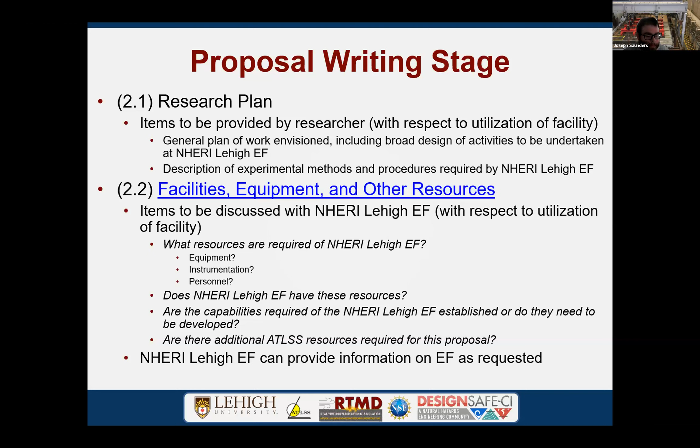Are there additional resources that ATLSS can provide that are not strictly under the NHERI umbrella? That's something we'd know on this panel, and you can certainly ask us. We'd be happy to provide any information.

So, schedule. A couple of big things here: physical space requirements, the actual footprint in the laboratory. We often have many different tests ongoing at the same time, so having an understanding of how big of a test setup you need is critical. Equipment, instrumentation, and technical staff are all important in terms of scheduling.

The budget: an NSF funded project can utilize the operations and maintenance budget for some qualified costs, and your NSF project itself will supplement with our O&M budget. Any projects not funded by NSF sources are responsible for all costs. We have detail on our website of the responsibility of costs and a rate schedule showing how much a piece of equipment costs to utilize. You can contact me for more information, and I can provide those documents.

And then a data management plan. What are the types of data that you'll need? How many samples? What software do you need to use? Do we have it, do we need to procure it? You'll want to know the standards for data and metadata format and content. Tommy can help here in structuring the data in a particular way, such that uploading later to the NHERI repository is seamless.

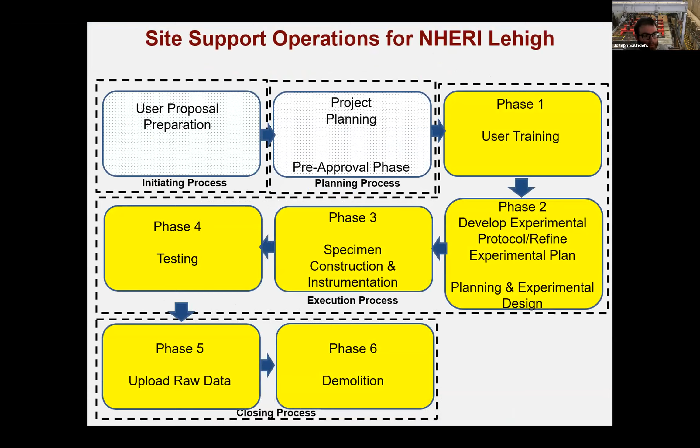So that's the pre-proposal phase, and now we're on to actual execution of a project, the post-award stage. First step is definitely

Compliance documentation and site utilization forms. These are forms funneled down through NHERI, and what these do is make sure that everything we talked about during the proposal phase - scheduling, budgeting, data management plan, etc. - is all spelled out, and that we as a facility agree that you have worked through that. We've worked through it together and come to an agreement on how we'll actually execute the project. The site utilization request form is a formal agreement between the site, the researcher, and NHERI.

It outlines things such as a description of the planned experiments, the experimental site - that would be us, NHERI Lehigh - scheduling, scope, all these things that we'd want to have done beforehand in the proposal portion. The sooner you work with us during your proposal, the smoother this goes post-award, because we'll all be on the same page with a schedule and budget, and a sense of what equipment you use and where and how we can use it.

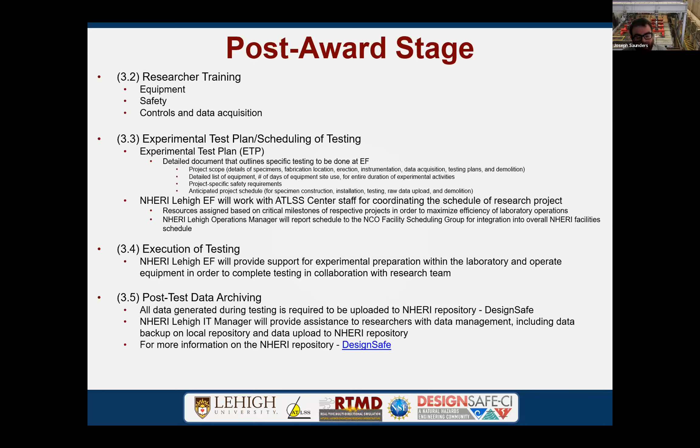Joe, one thing I wanted to add, this is very good. Some of those documents you presented, we have assistance with examples in our resources on our webpage, like the facilities and data management plan. There's usually questions that come up, so I encourage those preparing a proposal to review those documents, because they're quite helpful for completing your proposal. Some of these documents are a little mysterious in terms of what to put in there.

Yeah, and I mentioned too that a number of those documents we'd certainly be putting together with you, right? So when working out a project schedule and what equipment you need, we will help you outline those sorts of things.

Our next workshop is that in-person workshop, around the third week of November, Joe. So we'll post an announcement through the CI, and I assume everyone on this call on the Zoom will get an invite since they're registered before NHERI. Really encourage people to come visit us, because you've got to see stuff in person to recognize the resources we can provide to help you do your work.